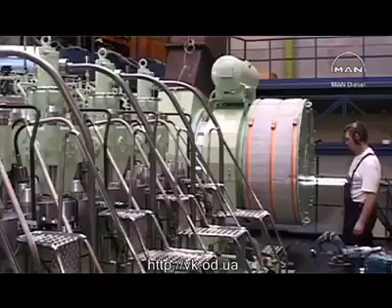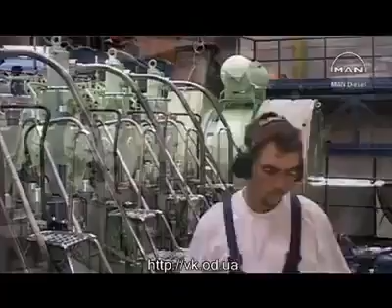These days, the diesel engine propels most of the tonnage of all of the world's shipping. Given good care, the diesel engine provides maximum effect on minimum oil consumption.

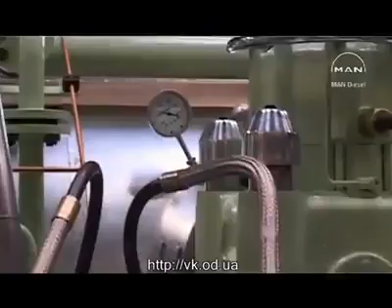The engineer will see to that. At the moment, he's checking the temperatures of the exhaust gas and the cooling water.

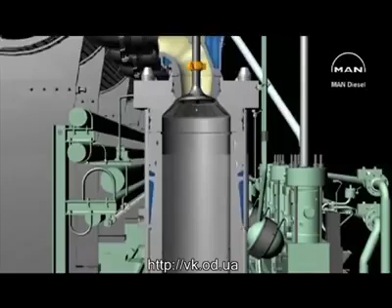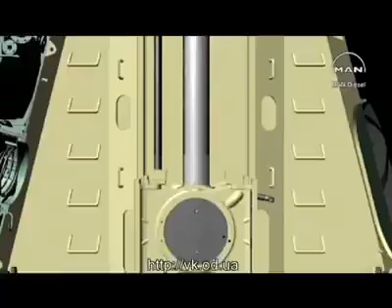To make a further study of the diesel engine, we leave the engineer and his instruments and put sight glasses on the engine from top to bottom. This reveals the movable parts: pistons, piston rods, crossheads, and connecting rod and crankshaft.

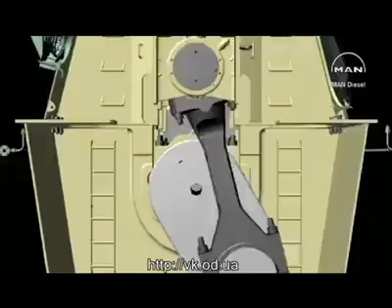This sectional view shows the functions which the most important parts of the engine have to perform.

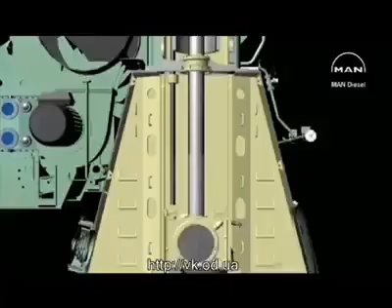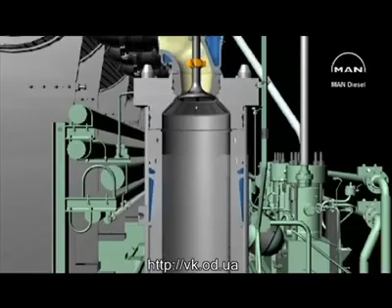In the upper part of the cylinder, an amount of fuel oil is burned, which causes the temperature, and thus the pressure, to rise in the combustion space.

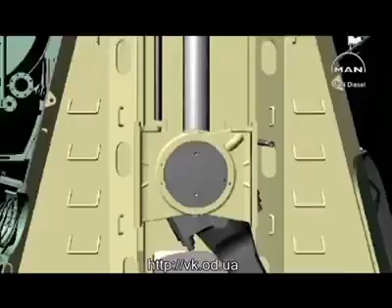The gas pressure acts on the piston, from which the force is transmitted through the piston rod and the crosshead to the connecting rod, and results in a torque.

The thermal energy has been converted into mechanical energy.

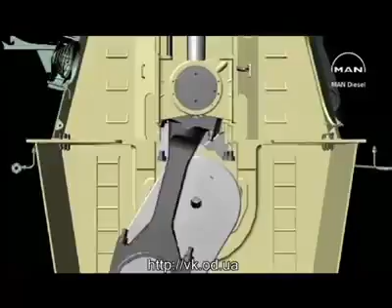In any given piston position during the working stroke, the crosshead is exposed to a vertical force from the piston rod, and a force in the direction of the connecting rod, which together result in a horizontal force.

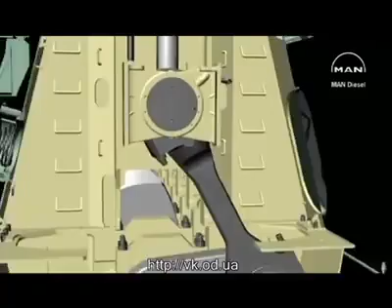This horizontal force must be transmitted to the engine frame, and for this purpose the crosshead is provided with slide shoes supported on vertical surfaces, the guide bars on the engine frame.

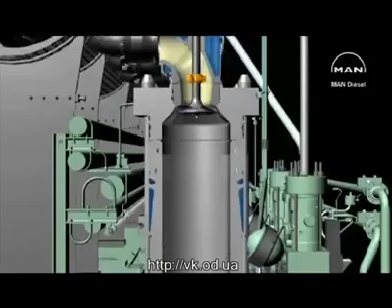Powerful forces are at work in a big marine engine, and accordingly the engine parts are of major dimensions.

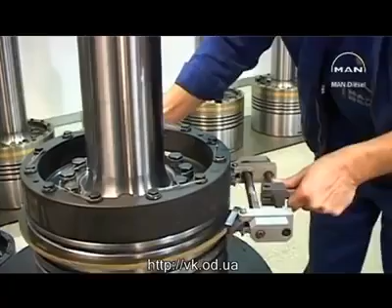To provide sealing against the high pressures, the piston is fitted with piston rings. The rings are fitted by means of a special tool which evenly distributes a bending moment to the rings, thus preventing the danger of a permanent deformation.

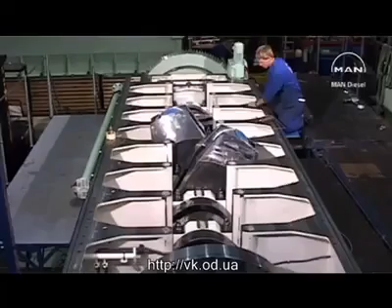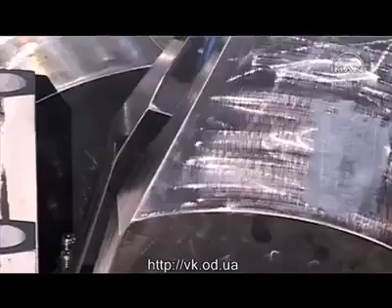On some engines, the crankshaft is so big that to facilitate manufacture and installation, it's made in two halves, which are later bolted together. Each half is built up from a number of main bearing journals, crank webs, and crank pins.

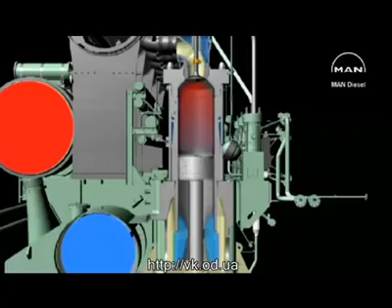Let's look a little closer at the principle on which a two-stroke engine works. Fresh air is supplied by a turbocharger. From the turbocharger compressor, it's conducted through air coolers into a common scavenge air receiver along the engine and to the scavenge air space around each cylinder.

When the piston approaches the end of the downstroke, the exhaust valve opens, the scavenge air ports are uncovered, and fresh air flows up through the cylinder.

Exhaust valve and scavenge air ports are then closed, and during compression the air is heated, causing the ignition of the injected fuel. The combustion increases the temperature and thereby the pressure, which drives the piston downwards.

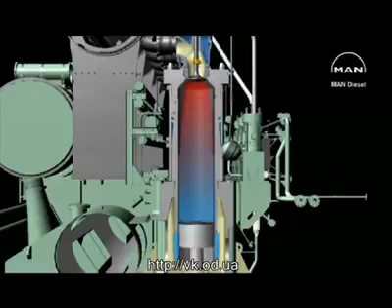The exhaust valve opens, the pressure falls, and the combustion products are expelled while fresh air flows in. The air is again compressed, fuel is injected, ignited, the gases expand, the exhaust valve opens, then the scavenge air ports, the cylinder scavenged, and the cycle is repeated.